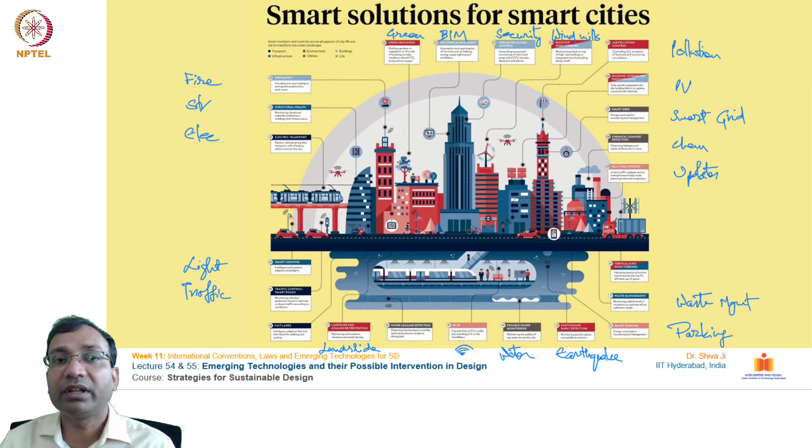Further, how are these technologies having a positive impact on improving the overall ambience and efficiency of our cities? With the help of automated information on the repairing which is needed, preventive repairs can be carried out, reducing the cost of maintenance or damages caused by normal wear and tear, resulting in huge savings. You can see some figures over here.

You can get this information from the internet on how these technologies are saving resources and energy consumption in these buildings, particularly in these many areas.

Further on infrastructure productivity, how infrastructure can be utilized more for larger output, because infrastructure once established will be standing for a very long period of time. So the capital invested, or the spaces or buildings created, can be utilized in multiple ways also. For example, if there is space allocated for running a certain activity, what happens once the activity is performed in a scheduled time? After that scheduled time, what happens in that building?

So this can be thought of as automated systems that can be designed to extend the uses of building premises. Similarly, we have seen technological interventions in traffic management, resulting in time savings for the users and city dwellers.

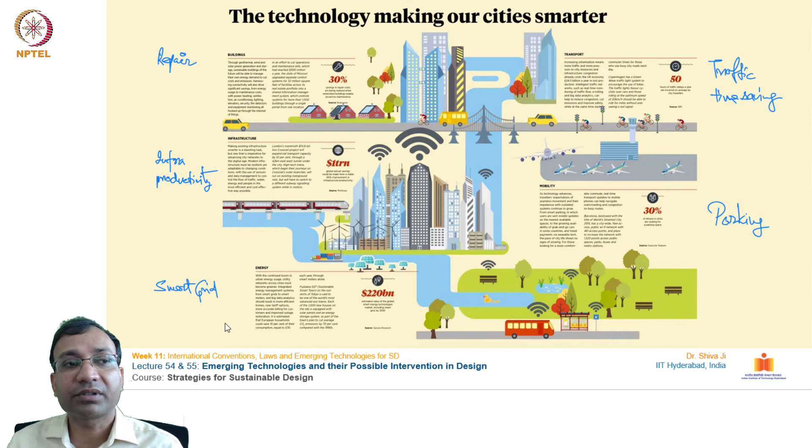So how can optimized traffic management systems be designed around these buildings or business district areas, optimizing cost saving, time saving, resource saving, and fuel saving. We've also discussed parking-based technological systems and smart grid systems, resulting in savings on resources.

So how are new technologies coming to the aid of the overall design and construction sector? We have prefab construction systems in place. For example, if a building is going to be constructed in the busy business district of a city, it's going to cause a lot of disturbance to the surrounding area. Plus, having construction work going on for a longer period of time will further increase the costs of that building.

So how can these prefabricated building components be utilized to create an optimum and efficient solution in a shorter span of time? This is one of the technological intervention areas, going for prefabricated building components for faster growth and faster pace of construction in places.

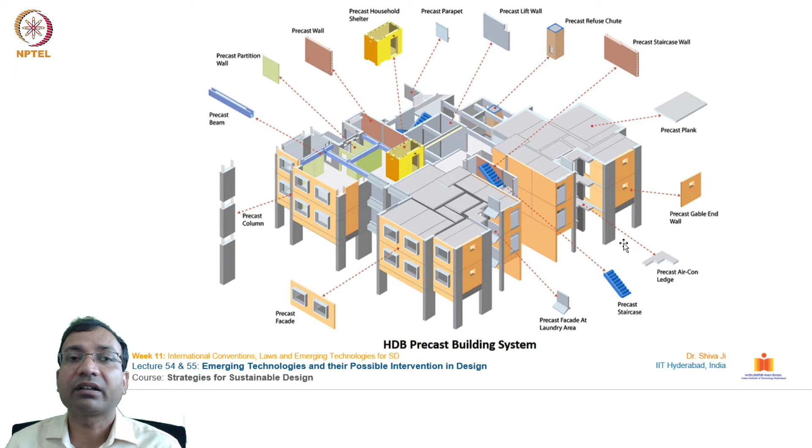You must be aware of 3D printing. It's an additive manufacturing technology. So this 3D printing is adding to construction in an efficient way. Plus it minimizes a huge amount of waste, because it doesn't leave any residues or extra material. It lays material only where it is necessary or where it is designed to be laid, resulting in significant savings from conventional subtractive ways of construction.

And methodology systems. There are 3D printers coming in at a very big scale, and they are good enough to build small scale structures, maybe 1 or 2 stories high. There are several examples from across the world. You may have already seen in the news how several agencies and companies are coming up with innovative ways for 3D printing buildings.

So this is going to be one of the disruptive innovations in recent times as far as the construction sector is concerned, because it will significantly reduce the operations, the management, the costing, and the material or energy consumption of the building.

So this is one of the areas where you must put some attention. You can take help of this 3D printing technology, and you can come up with solutions for how the materials which are required for building construction can be utilized for 3D printing in an efficient way.

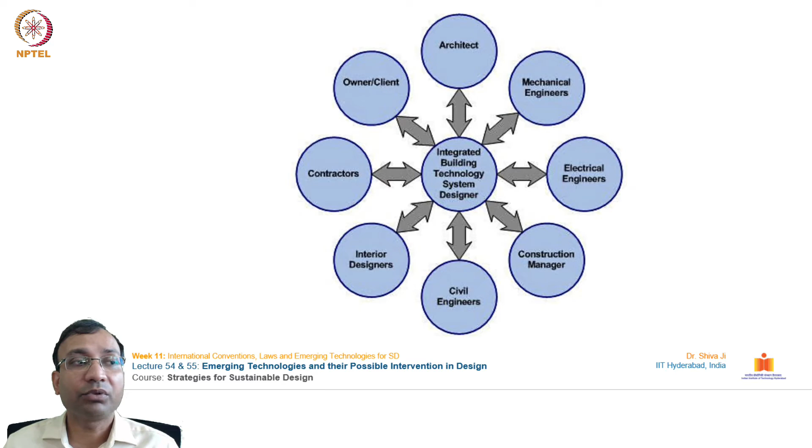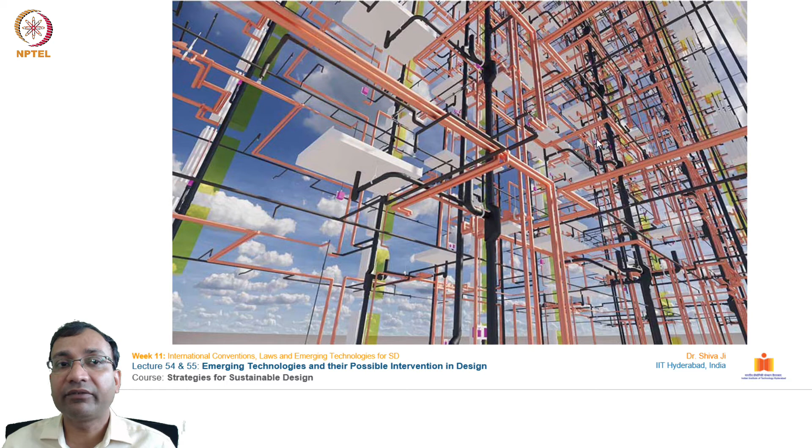How this BIM, building information modeling, helps us lay down each and every segment, each and every part of this piping network implemented in any given building, so that the operators, the people taking care of maintenance and operations, can actually take care of it, and create isolation areas. If there is any fault in a certain segment, they can identify that fault, isolate that segment without interrupting services to the entire building, and go take corrective measures.

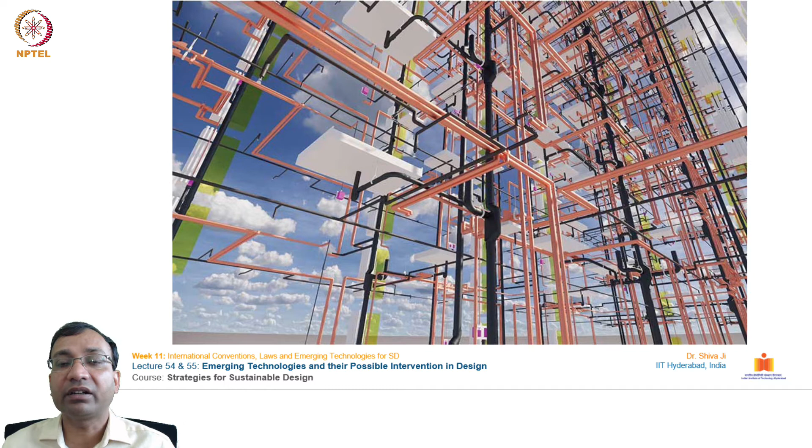This is a network we usually do not see with our naked eyes, but our buildings are actually fully functional, sort of like living organisms, which consume resources, do some work, and leave out some waste material also. This is like a living system, so this is how a building works, and technological interventions can help conduct this work efficiently.

Further, we are talking about BIM, building information modeling. Starting from the design phase, the conceptual phase, where we are envisioning what kind of services and operations and utility we desire from this premise, and then going for detailed design, analysis, documentation, fabrication, construction, the logistics related with construction, operations and maintenance, renovation, regular preventive maintenance, programming, etc., and then the end of life stage. So BIM handles the operation stage completely.

It takes care of each and every component, each and every service inside that building, whether this is water supply, fresh air or conditioned air supply, whether it's a fire prevention system, or some alarm system, or energy consumption system, maybe for lighting, ventilation, etc., even for operating lifts, escalators, etc. So this takes care of all of those things.

It can even calculate the energy load which can happen on any given building at any point of time in the year. So this has an analytical component also, which takes care of energy planning, so that energy consumption can be minimized. So you see, BIM is a very utilitarian technological intervention in the building industry altogether.

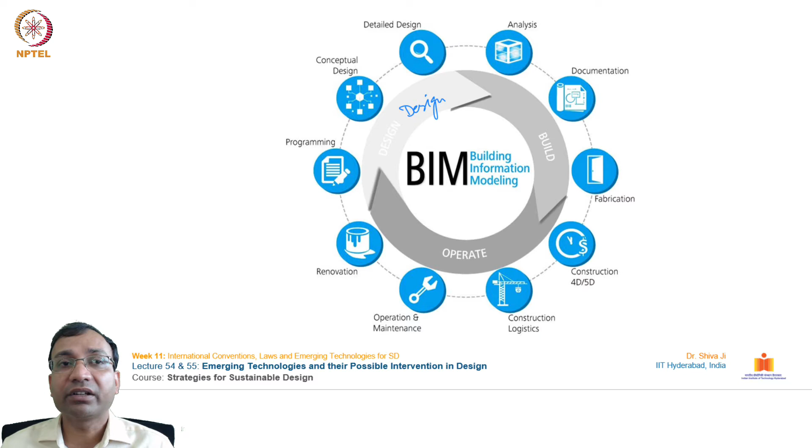All of these factors play an important role in deciding the material specifications. In materials science, this area, it is very important to have technological input. There are some technologies available these days which help in controlling the glass.

The intake of light can be controlled and changed by the occupants. The orientation of fins can also be changed depending upon the time and month of the year, how much light we want to take inside the building premises. Such efficient methods are there to improve the experience and operations of any building.

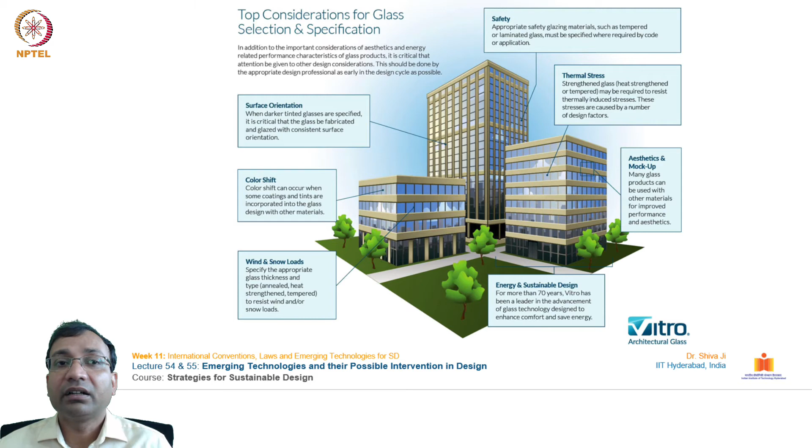One must take help of such technological inputs and apply them on their projects. Further, there are technological interventions in fire safety also in the buildings.

New types of sensors and isolators are coming these days, which can sense the fire and isolate a certain segment of the building in order to reduce the spread of fire to other sections of the building.

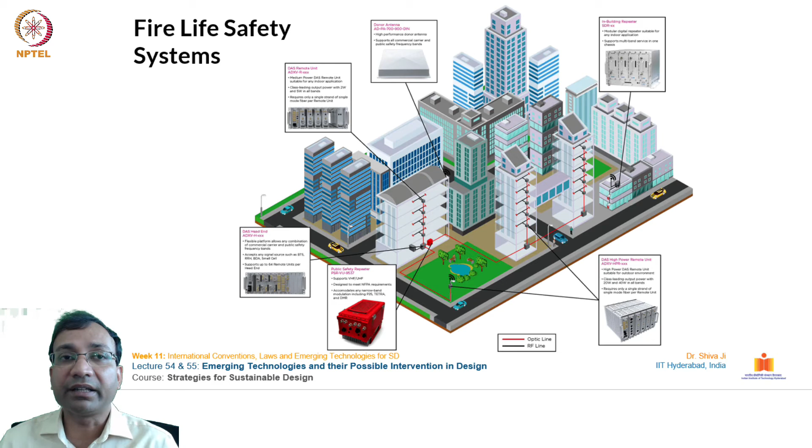These systems are also being installed in multi-story structures, because they are highly vulnerable to damage by fire, and extreme hazards are likely in such incidences. This technology is being implemented in most upcoming high-rise buildings, enabling fire safety over a longer period of time.

In an overall sense, we have several areas, several domains where technological interventions are happening in the building industry today.

Further, technological inputs for flexibility of uses of buildings. How a certain activity can be wrapped up in a shorter span of time, and the building floor pad can be made available for other activity. This flexibility and adaptability of building spaces is also one of the domains where technology has come to its rescue.

Further, cognitive buildings are able to sense a number of things, and they are able to strategize and plan the use of resources, or take corrective actions to safeguard if there is a safety or security concern, or if there is any kind of hazard, so they're able to take corrective measures.

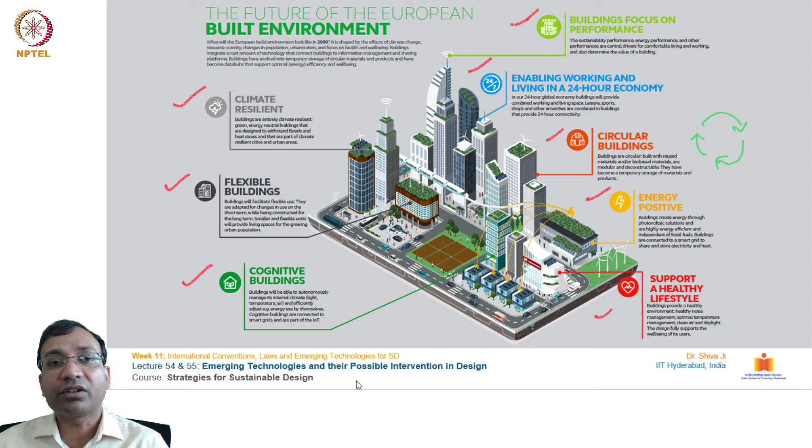Starting from physical comforts to psychological comforts, how buildings can come to the rescue - there is huge scope for technology to address each of these intervention areas.

Further, in networking, each and every gadget, each and every appliance, each of our electronic devices are connected with the internet. They receive information, they receive data, they function with the desired given commands. For that, this huge networking system is one of the very important and necessary things to do.

Whether it is a wired based connection or a wireless based connection, irrespective of this, a good networking system inside the building premises is one of the most required entities.

In the recent pandemic situation, you may have experienced the use of electronic gadgets such as phones, computers and internet grow considerably high, because they were able to facilitate us for our education, e-commerce activities and several other things.

We can, with the help of this growth in telecom and computing - which India was already witnessing for the last few years - this has actually come very handy for Indians to survive through this pandemic situation.

So obviously there is a need to further strengthen this networking in the building premises to achieve an optimum connection.

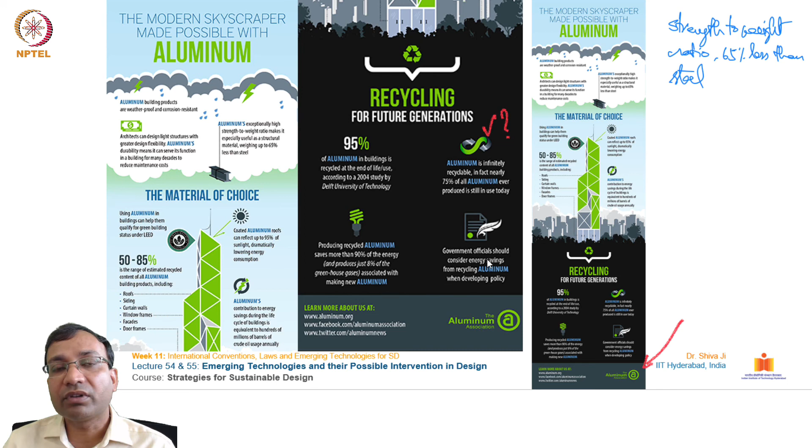Further, 50 to 85% is the range of estimated recycled content of all aluminum building products, including roofs, sidings, curtain walls, window frames, facades, door frames, etc. Aluminum's contribution to energy savings during the life cycle of a building is equivalent to hundreds of millions of barrels of crude oil used annually. If we compare with other materials, certainly it has advantages—so why not use technological interventions to improve upon these materials and reduce the impact.

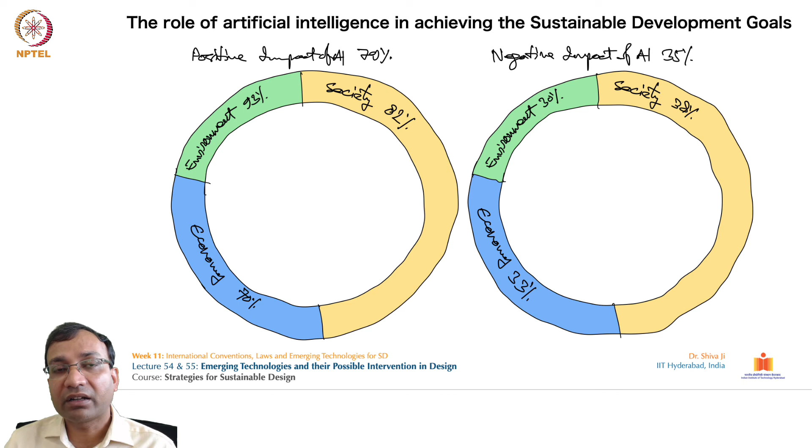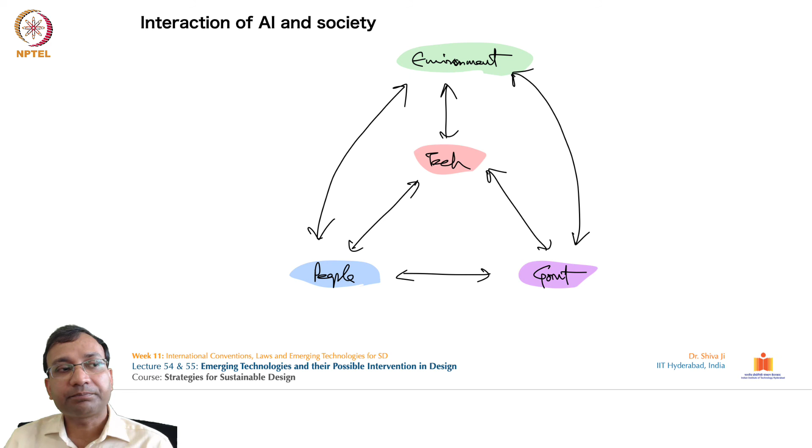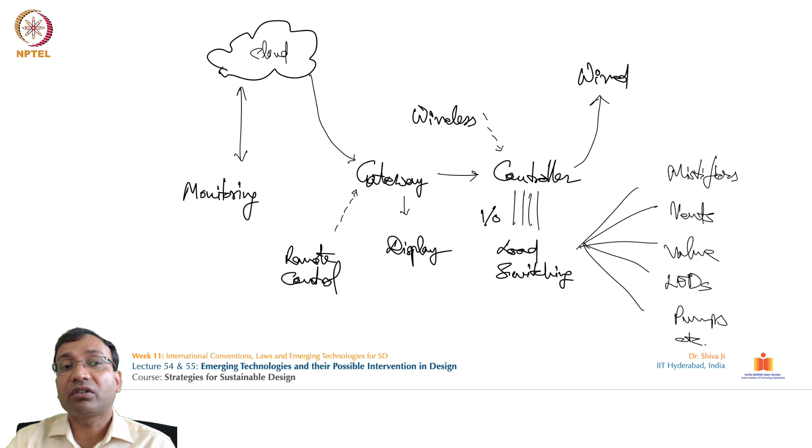We can strategize why this technological interaction and this lecture was needed, for our understanding of how we can devise our buildings according to the technologies, or by adopting new emerging technologies which are coming into use these days.

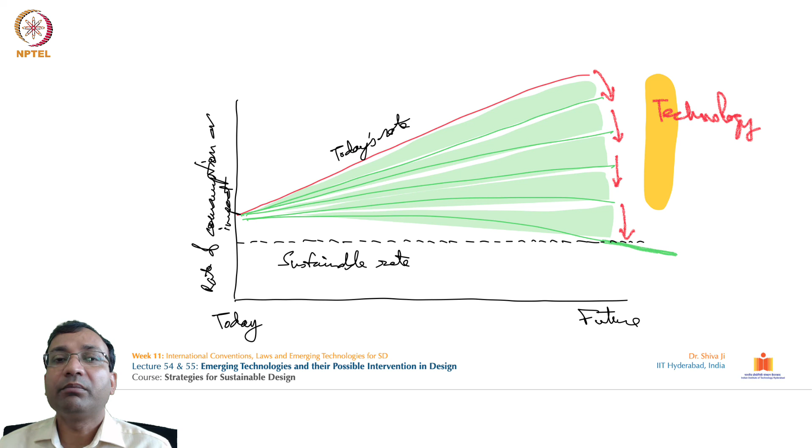This curve is the responsible curve causing global warming, climate change impacts and several other disturbances. Through changes in our consumption pattern, it will start bringing efficiency to the whole consumption pattern, and slowly it is expected that the required consumption rate to reach sustainable growth can be achieved in the future. So you see the impact and role of technology, which is very promising, and we must go for technology adoption to improve our overall sustainable growth and development processes. With this, we have come to the end of this lecture.